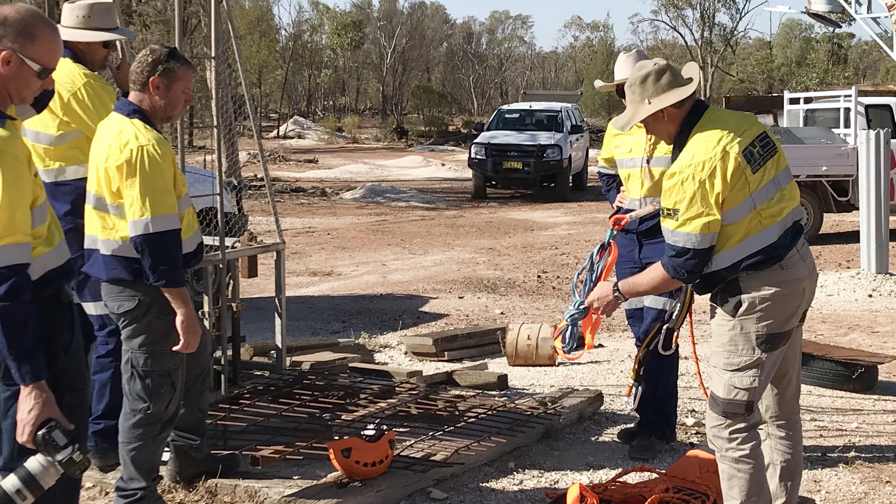There is a range of risks associated with opal mining, and there have been serious injuries and fatalities of opal miners in New South Wales. Miners need to take precautions to ensure they are safe in the field. Hoists, shafts, and their associated components can be particularly dangerous unless they have good mechanical and electrical design, safety features, regular maintenance to ensure they remain in a safe condition, and that safe procedures are followed.

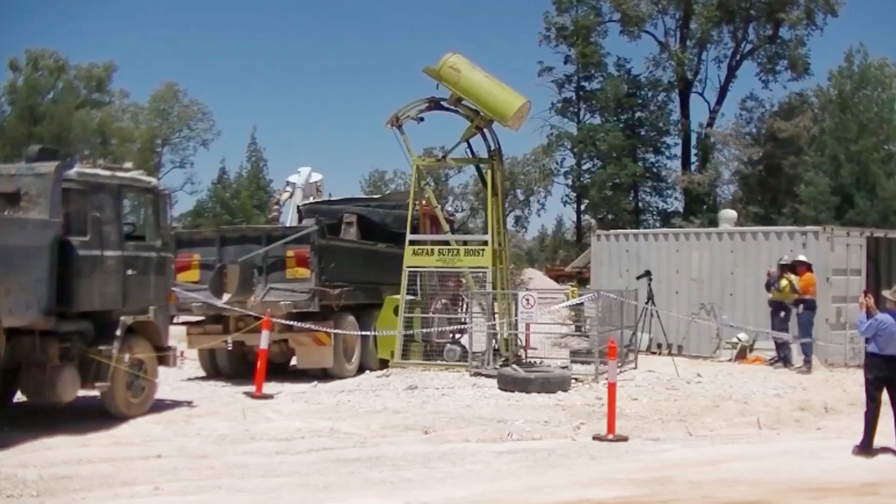Some of the hazards include working under suspended loads, working at heights, and falling objects. Miners and workers should never be under a suspended load without adequate controls in place. This includes under a materials bucket. If work must be done under a materials bucket, it must be securely locked in position to ensure it cannot freefall and strike a person. If a bucket becomes stuck, never put yourself or workers under it, as a free-falling bucket can be fatal.

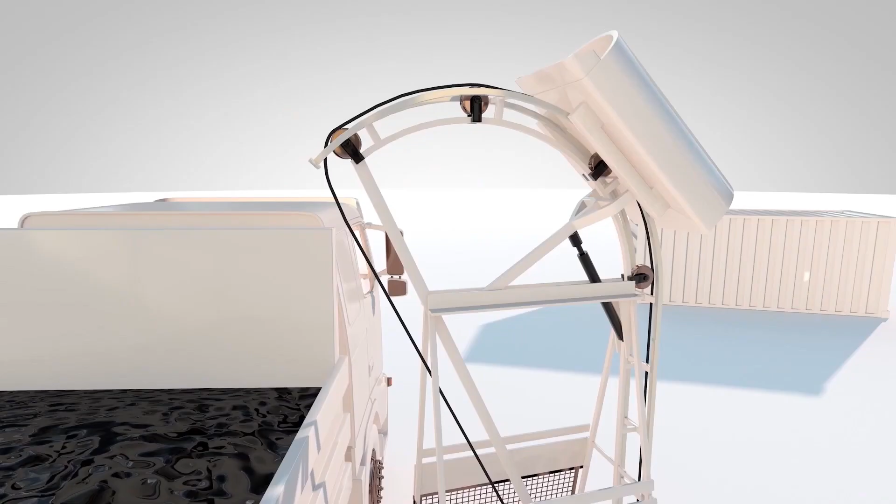In 2016, a miner was in the hoist sump cleaning out rocks. The rocks were preventing the lower limit switch from triggering, so the power would not switch off, and the rope overran onto the drum in the opposite direction. While in the sump, it is believed the miner accidentally triggered the lower limit switch, which cut power to the hydraulics. It caused the empty bucket, weighing 133 kilograms, to freefall about 15 meters in 3 seconds. His injuries were fatal.

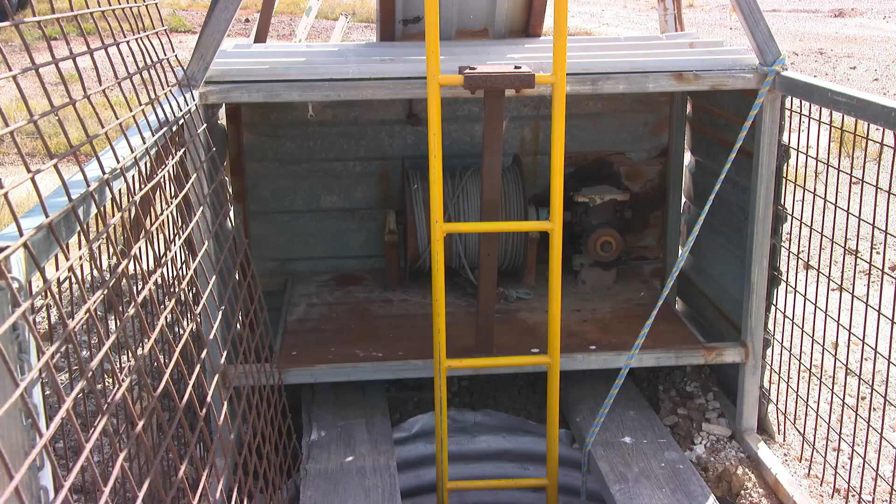Falls from height are a major risk when working in and around shafts and resulted in an unacceptable number of serious injuries and fatalities in the Lightning Ridge region. Falls can occur during working around an unprotected shaft, installing a collar, hoist setup, maintenance on the surface and in the shaft, and access and egress to the mine.

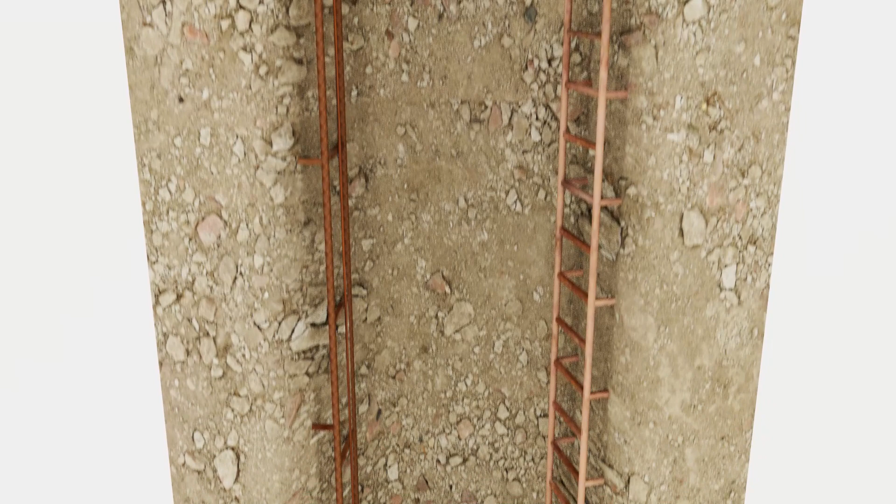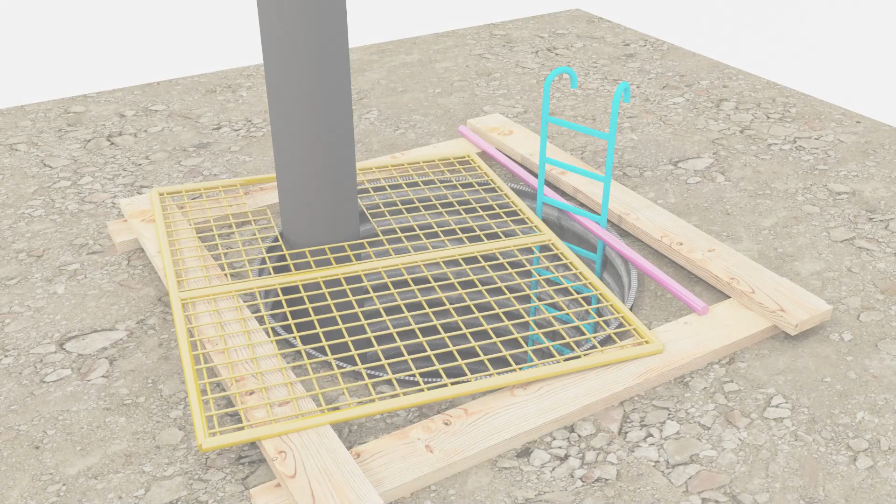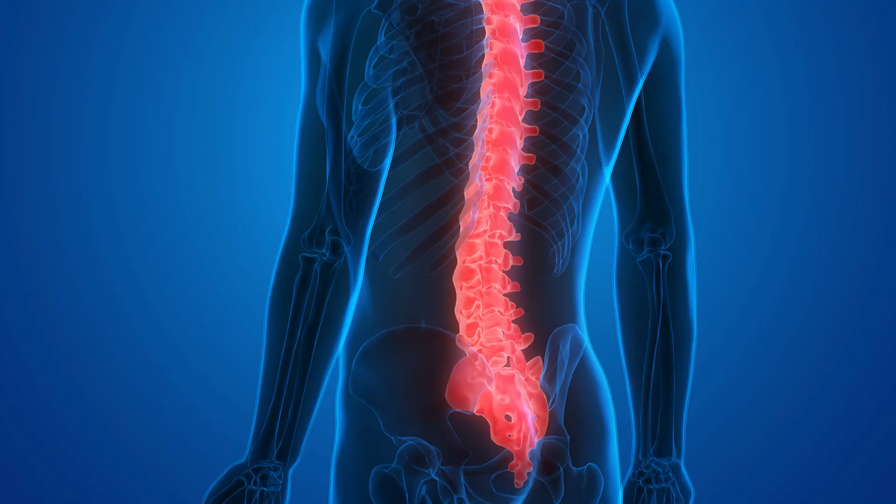In 2018, a miner fell 20 meters from a shaft hoist access ladder, landing in a hoist bucket. He suffered a compound fracture to his left femur and both tibias. It took nearly 2 hours to locate him and a further 3 hours to rescue and transport him from the mine. In another incident, a miner was almost at the top of the shaft when the access ladder failed. It was not adequately secured at the surface. The miner fell to the bottom of the shaft and sustained serious injuries, including multiple broken bones, a spinal injury, and dislocated arm. More than 2 years on, he is still recovering.

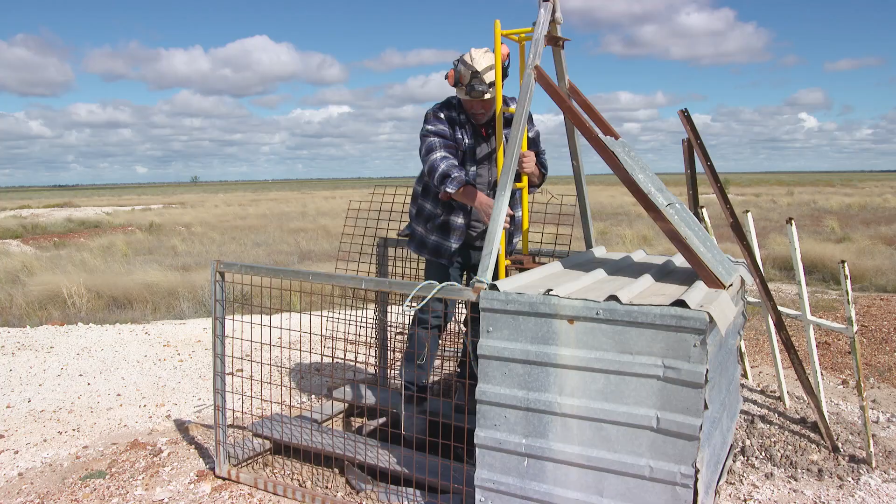When using a ladder, always maintain 3 points of contact. For example, 1 foot and 2 hands, or 1 hand and 2 feet. Also, make sure you or any workers using the ladders are physically capable, well, and fit to climb. Fall arrest systems provide safer shaft access. Safe Work Australia recommends using anchorage lines or rails with long vertical ladders. Alternatively, a rod or tube can be installed alongside the ladder to latch onto at set intervals, thereby limiting the maximum fall distance. A full body harness connected to an attachment point should be worn.

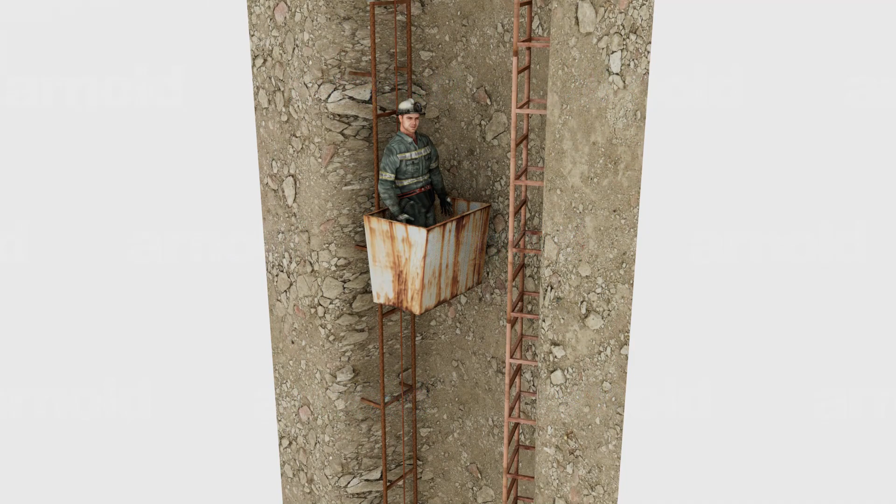And never ride a materials hoist. There are many dangers associated with riding a materials hoist, with serious and potentially fatal consequences. Past incidents have involved feet getting stuck between the ladder rungs, miners caught between the bucket and the shaft wall, rope failure resulting in miners falling in the bucket at speed to the bottom of the shaft, miners ejected or dumped from the hoist bucket onto the surface or into the back of the truck.

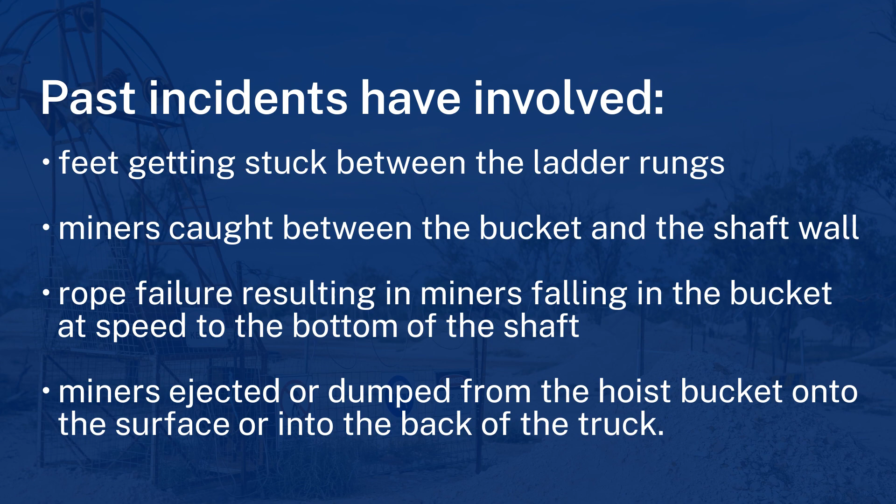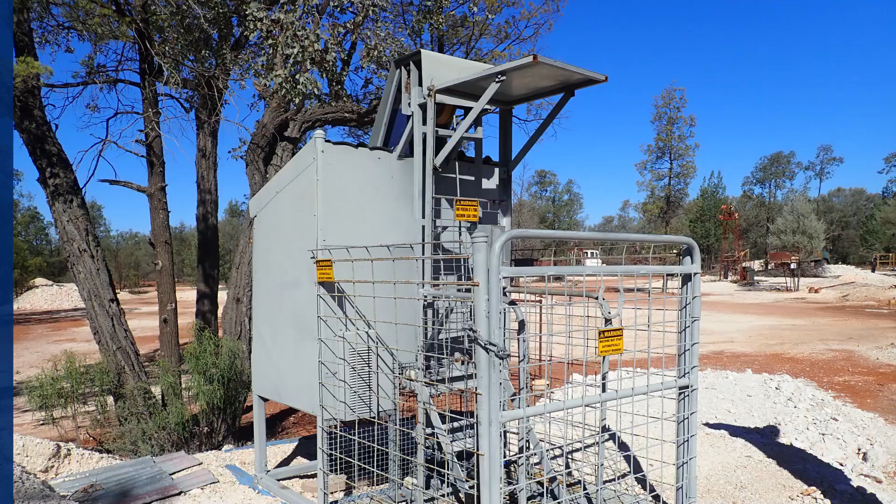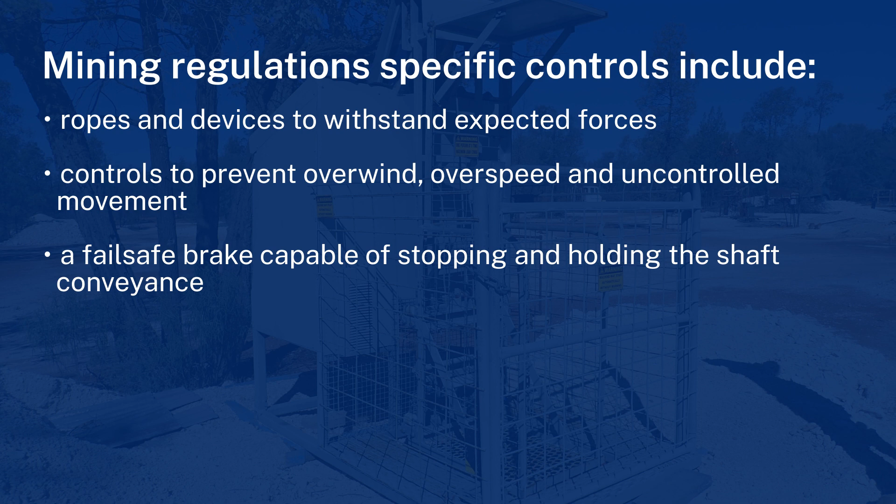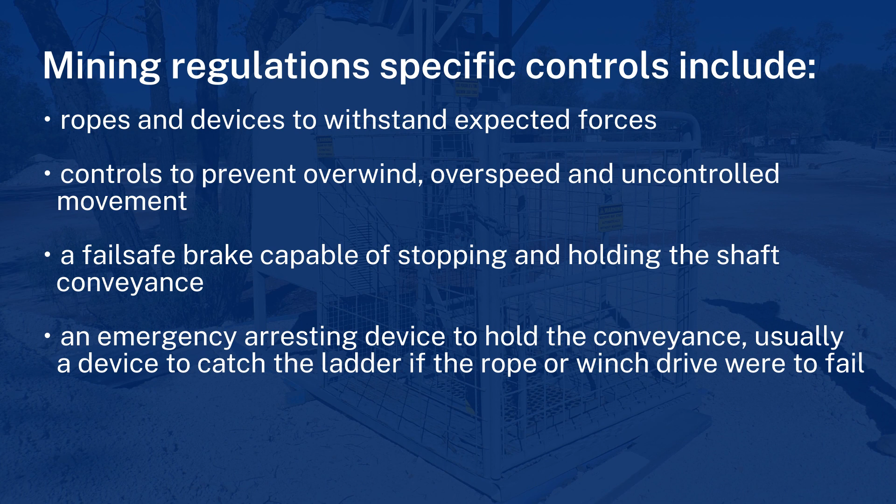Persons riding hoists must comply with the Work Health and Safety Mining Regulations released in September 2022. These require specific controls, including ropes and devices to withstand expected forces, controls to prevent overwind, overspeed, and uncontrolled movement, a fail-safe brake capable of stopping and holding the shaft conveyance, an emergency arresting device to hold the conveyance, usually a device to catch the ladder if the rope or winch drive were to fail, and the conveyance must have protection for the person, such as a cage.

Person riding hoists must have energy lockout or isolation for mechanical and electrical devices, so work and maintenance can be carried out safely. There must be controls in place to prevent people, rocks, material, and plant from falling down the shaft. Person riding hoists must be tested and inspected to make sure they remain safe. A record of the inspection and testing should be documented and kept. The inspection should be completed at least once every year.

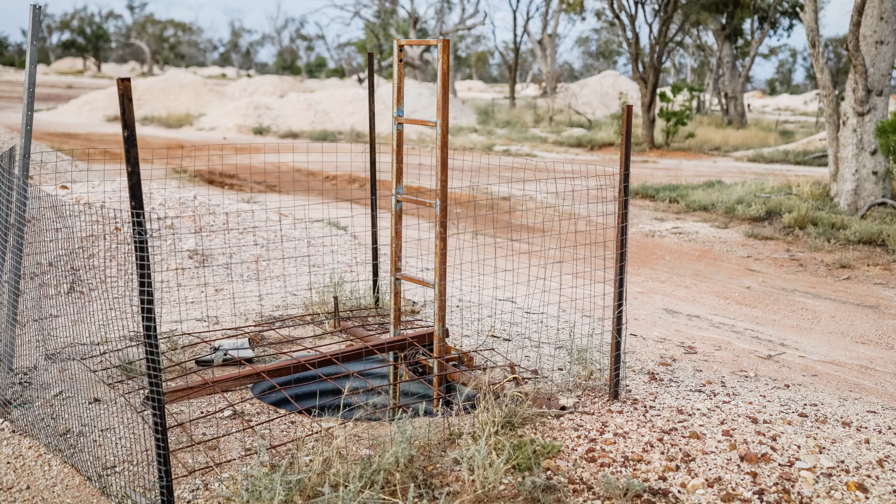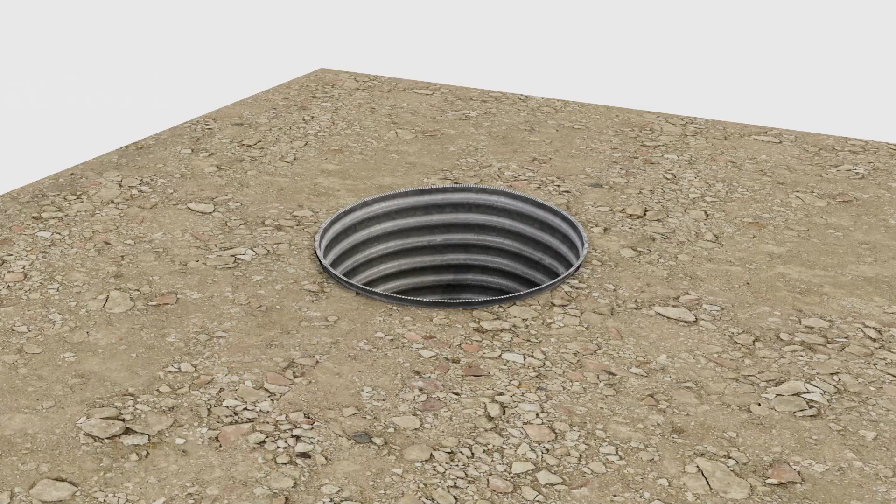When in the shaft, loose objects can fall on or hit people if precautions are not in place. Loose objects can also cause trip hazards at the shaft entry. Before going down a shaft, remove all loose objects at the top. The shaft collar should be higher than ground level to prevent anything falling below. It should be surrounded by timber or steel barriers on 4 sides to prevent tools and equipment from inadvertently being pushed under the mesh cover and falling down the shaft.

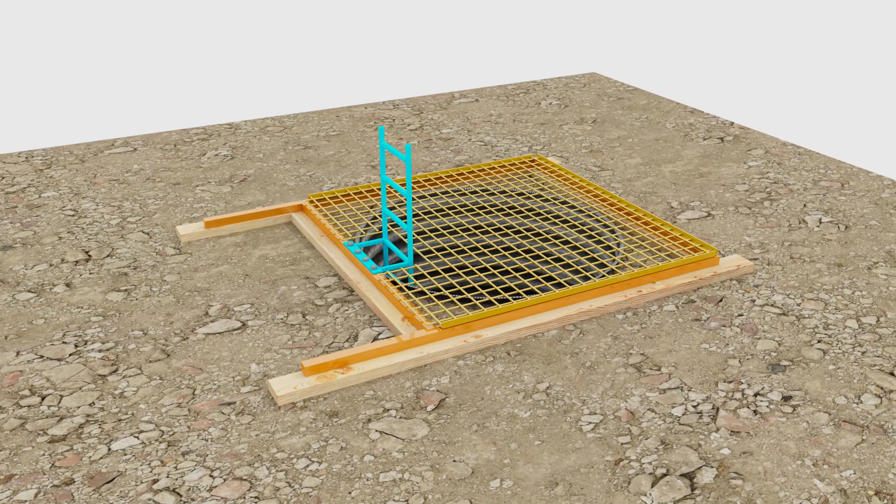The mesh size on the cover should be small enough to prevent large stones or common tools from being able to fall through, and it should provide a suitable means of securing the ladder. Any items lowered in the shaft must be appropriately secured, and a hard hat should always be worn in the shaft.

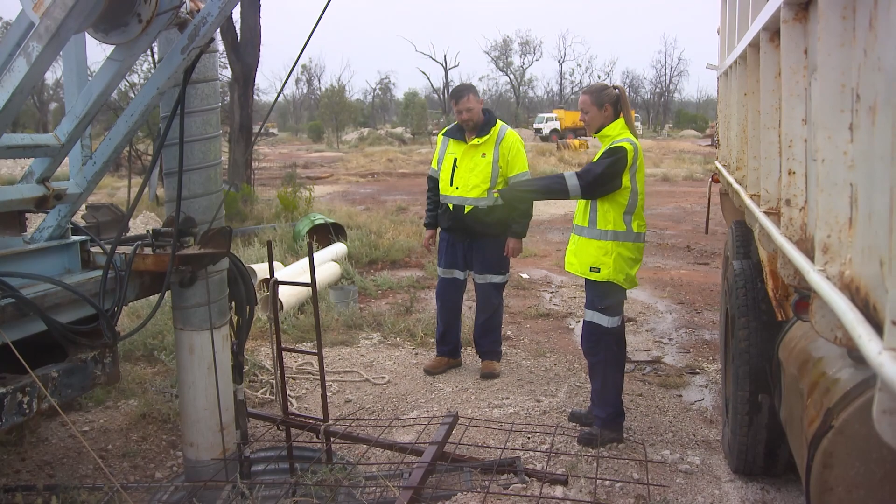One miner was on the ladder in the shaft as an angle grinder was lowered in a bucket. The grinder fell out of the bucket and struck him. He was not wearing a hard hat and suffered a significant laceration to his head. His injuries were fatal. Great care also needs to be taken when working around the shaft, and equipment should be placed at a safe distance.

In another incident, a miner went to start his generator located on the back of his ute, which was parked near the shaft. The opening was not protected at the time. As the miner pulled the generator cord, it broke. He fell headfirst down the shaft into the materials bucket.

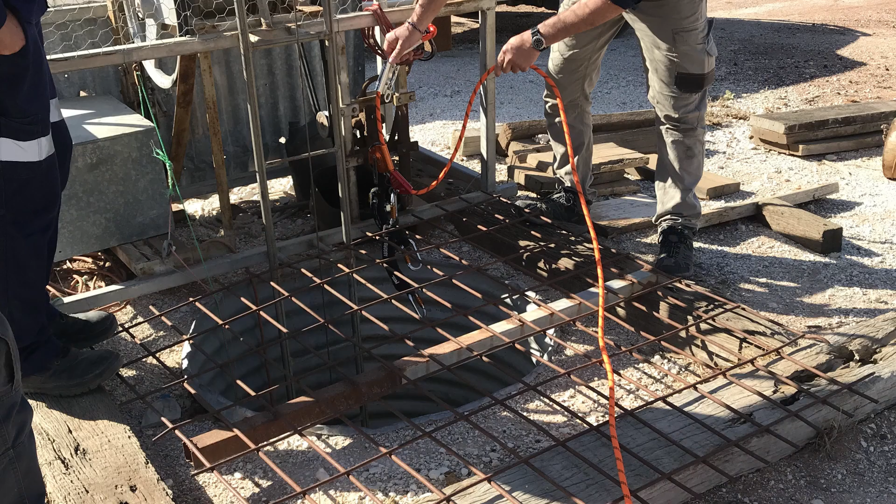The fall was fatal. Most activities on a mine site can be potentially hazardous, and things don't always go to plan. Safe mining is about properly managing the risks by ensuring the best available controls are in place to lessen the likelihood of injury to you, your workers, or damage to plant. For more guidance on safe strategies and systems for opal mining, visit the New South Wales Resources Regulator website.